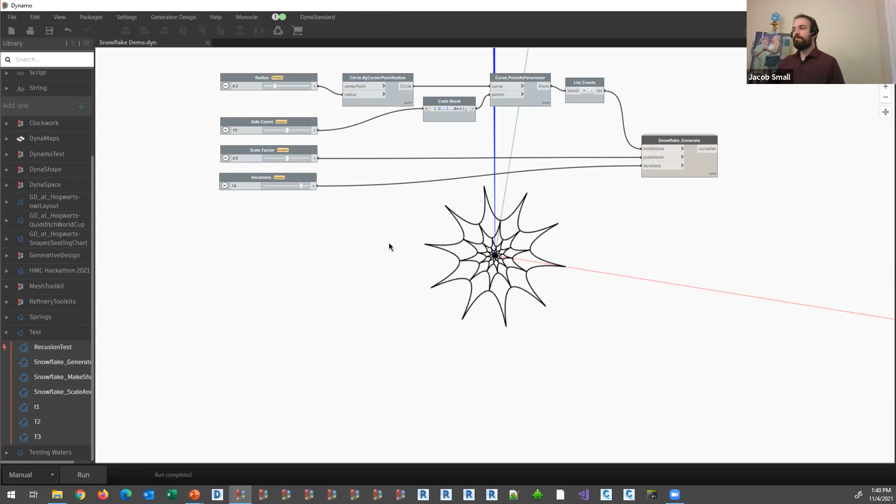Cool. All right, great info there, Sol. Let's pop over and have a look at some custom nodes in action. All right, so this is the first custom node that I've put together. And this is a graph where basically what I wanted to do is make these starburst, snowflakey shapes sequentially, right? And I wanted to be able to control some of these pieces.

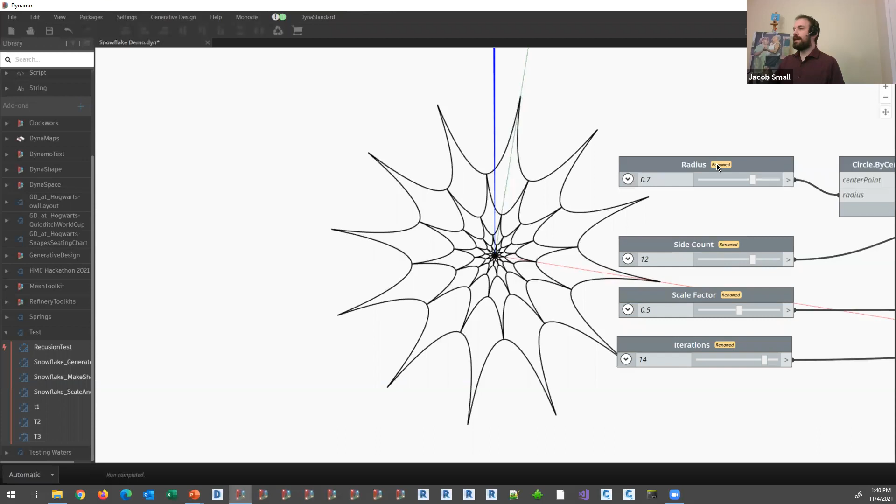So I wanted to be able to scale up the size, that's the wrong button. Scale up the size of my piece, change the number of sides. We'll go ahead and switch this over to auto so it runs instantaneously each time. If I wanted to adjust the scale factor on any individual loop, right? And so we can start to get these kind of spirograph shapes and scale patterns and whatever else it may be, which is pretty cool. Or if we were to change the number of iterations, right? Put less pieces on canvas, more pieces on canvas, whatever it may be.

And when you put something with this degree of simplicity in front of a user, pretty much anybody could figure out and play around with it and get some cool results, and likely even use that in their design if it meets the needs that they're really after. The harder part would be the original authoring, right? And that authoring in this case was several steps bigger. So this is the first one of those nested custom nodes that you can see here.

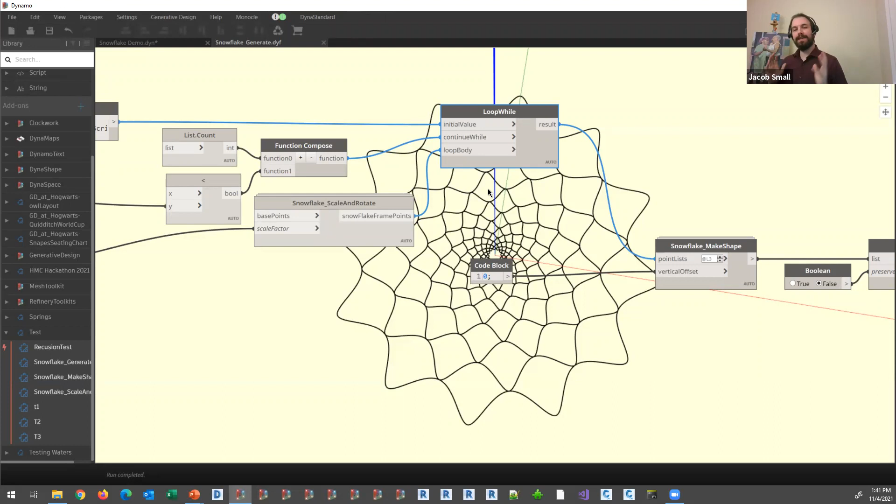I did have some looping, and I mentioned before, be real careful with your loops, make sure they actually end. If you say, as long as this number is less than that number, keep doing this, and you've got your XY inputs backwards, Dynamo will lock up infinitely and you will never get out of it. So definitely keep an eye out for that kind of content.

But you can see I've done some function passing where I've built a function from list count and is the next value less than the number of iterations that I'm after, and then pass that on into this loop while to use this other custom node, snowflake, scale, and rotate. And when I pop this open, you can see we've got more nodes, right? And this one isn't too crazy in terms of the content that's there, but the same content still applies. We've got our basic output all the way over there. We've got our inputs over here.

I've taken the time to spell out what I want the descriptor to be, right? I've wrapped it in multi-line quotes in case I wound up going multiple lines. So in this case, I can actually hit return there, and that content will keep as a quote line. Whereas if I'd used the other method of double slash, we would have to double slash repeatedly in order to make that work. So definitely, if you think you might have multi-lines, go ahead and just multi-line it out early on. Just makes your life a little bit easier.

So this comment is what gets exposed on this input, right? The points which form the basis of the snowflake. And if I come back here, the points which will form the basis of the snowflake, right?

The scale factor for the nested snowflake framework, and then the scale factor for the nested flake framework. Note there are multiple lines there, and this is pretty well scaled to the size that those inputs will go. So if your content starts to run long in terms of the help, but really useful info there.

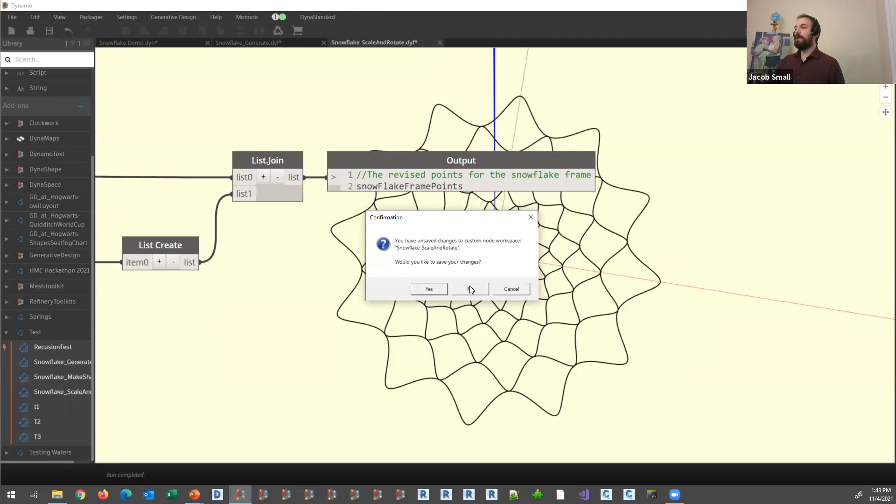And then we've got the same sort of content on our output ports, right? And again, we're doing this custom node inside a custom node inside a custom node so that we can make use of that other content. But you can see here, I've set what that output is. I've named what I want it to be. And that's the sort of content that really matters to help this scale up. I'm going to go ahead and close this. Yes, I will save changes for now, and then we'll look at the next custom node.

So we've passed this as a function in to do this function over and over again, as long as this statement continues to evaluate to be true, with this as our input, which is a nested list of points. Notice I did have to spell out my rank in there as well. And I generated a default value, right? And it's a pretty big one. That's a lot of text in there. I wouldn't necessarily expect everybody to know what that means, but it does get the point across, and it does allow this content to run if I don't provide one of those input values.

So anyways, we loop over that function that we built there X amount of times, and we move into this snowflake make shape node, and we open this up one more time, and then you can see all that content is there, right? Where we've taken our nested list of points, and then the vertical offset of each leaf. I've got that set up there, not really doing much with that, but there you have it, and then running this all the way over, eventually getting my output that I've set as just snowflake with nothing else going on.

So now when I come back here, you can see we're then going to clean that content up, flatten the list, shuffle the list in case I wanted to put some fun colors on it or something like that, and then set that output. And I also spell out what this should be. It should be a list of curves, not an individual curve. And this is going to enable autocomplete to work a little more holistically while simultaneously providing that other piece of content. So now when we get in here, you can see how all that works. And again, all of these pieces that I've nested one inside the other all happen sequentially for every user.

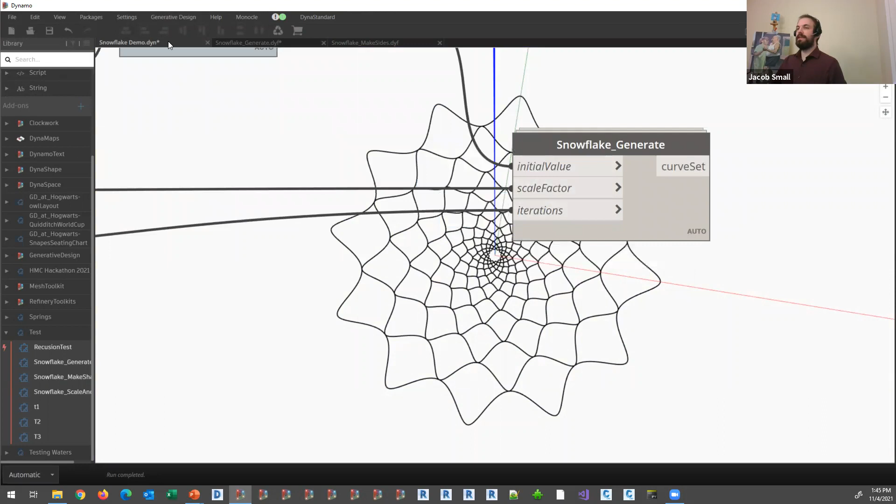I'm going to do one other thing. So we're going to look back at our original order here. We've got initial value, scale factor, and iterations. In this piece, I would take iterations as the last one, but it's listed in the middle here. So let's try and reverse these two. I'm going to go ahead and copy and paste this node, and then we can just hold down Shift and drag in where we want this to be.

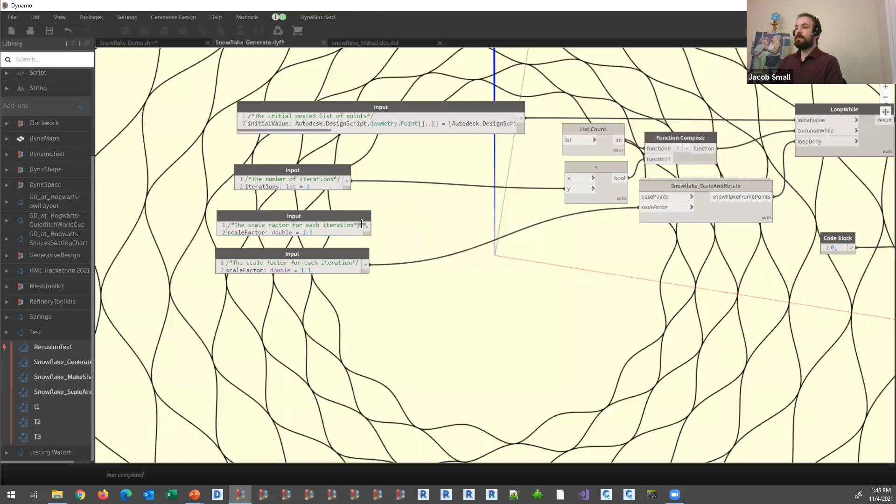Notice that background execution that happened there as I moved this around. That wasn't this node actually updating itself. There's no way for me to hit run here. This node that's running in the background is what's executing. So we'll come back here. Now that I've got this one, we'll go ahead and hit delete. We'll save on that. And looks like as I did that, I may have actually broken my content. Let's come back here and find out.

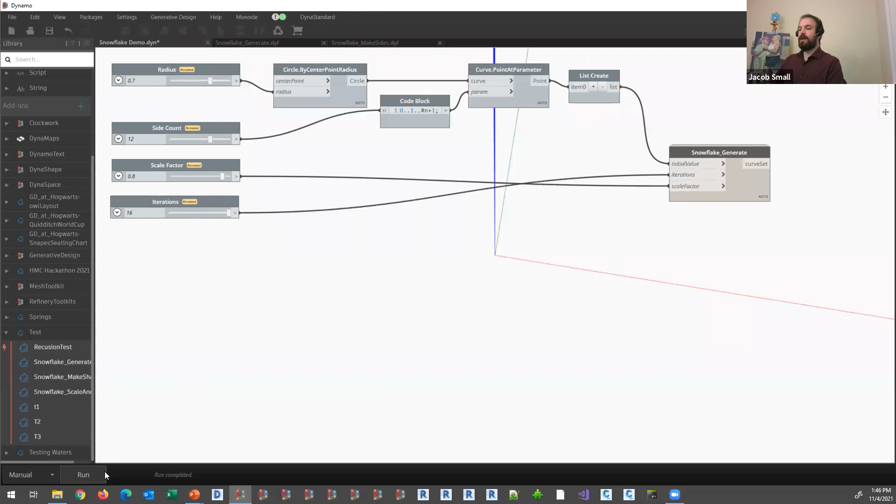We'll change this run mode back one more time. Scale factor is now listed below, whereas iterations is up above. As long as the value is less than 1, okay, that's definitely not going to work, right? So that change right there, just copying and pasting, is what caused that content to go out of sync. And that method of doing the copy paste is what you'd have to do to adjust those variables. That's the user interface way. You can do it under the hood by manipulating the text, but that's definitely much more advanced as you go along.

But from here, this content, again, can be leveraged at scale. You don't have to worry quite so much about doing that content over and over and over again. Another thing we can do here, if we come back all the way to this snowflake make shape, if instead of having the wavy curves, let's say we wanted to have something that's a little bit more angular,

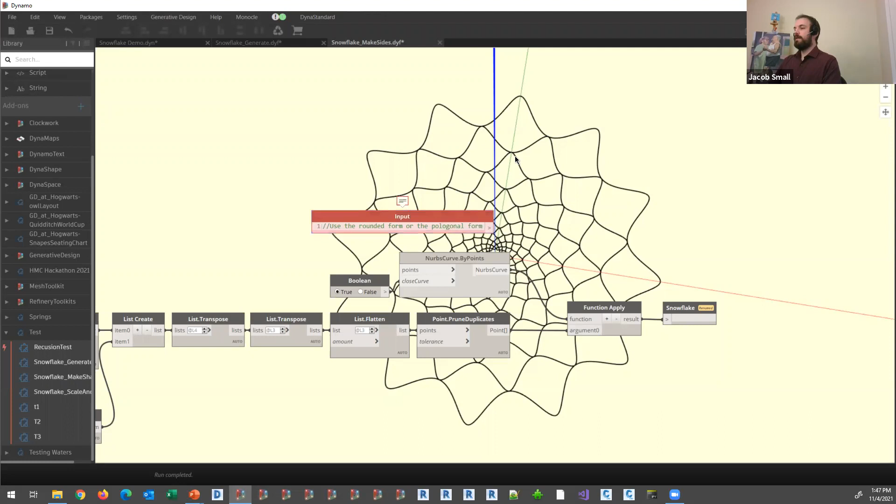I'm going to go ahead and set up a new input. And we'll comment out what we want this input to be: use the rounded form or the polygonal form. We'll go down one more line, and then we're going to call this rounded. It is a bool. The default value is true. Right? Content all runs through there.

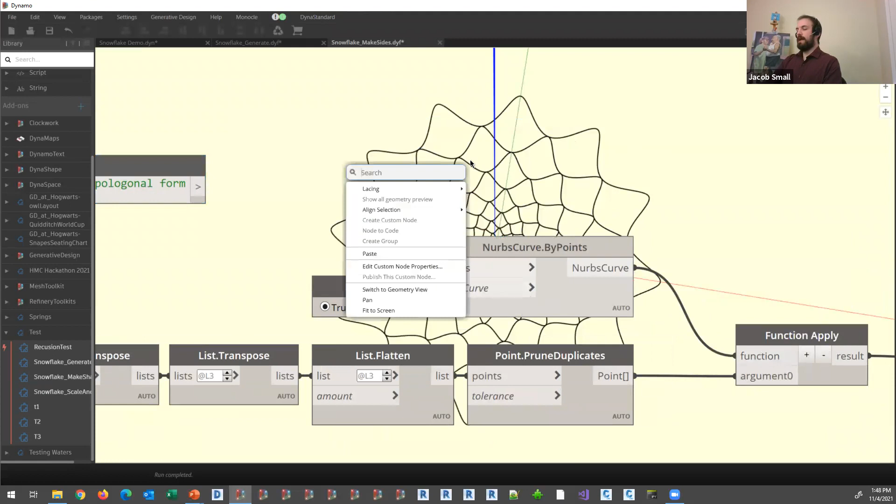Now I've got this node here that's set up to pass as a function into the function apply. We'll use a polygon by points node. This also can take a list of points, right? And then I'm going to take both of these functions and I'm going to say if. Put an if node on canvas, and if this returns true, we're going to return the rounded one. Otherwise, we're going to return the polygons.

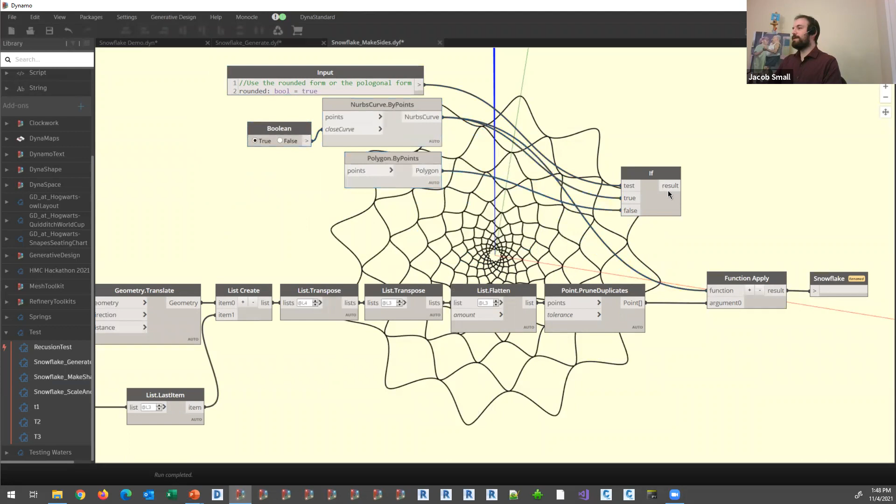These are backwards, and I really dislike crisscross lines. So I'm going to go ahead and move those around. No more crisscross lines. Much happier as a human being once that happens.

So now we can take our if node, wire that into the function. If this returns true, it's going to do that. If that returns false, it's going to do that. And now I've got a new input inside this make sides node, right? I'll go ahead and close this, saving the changes.

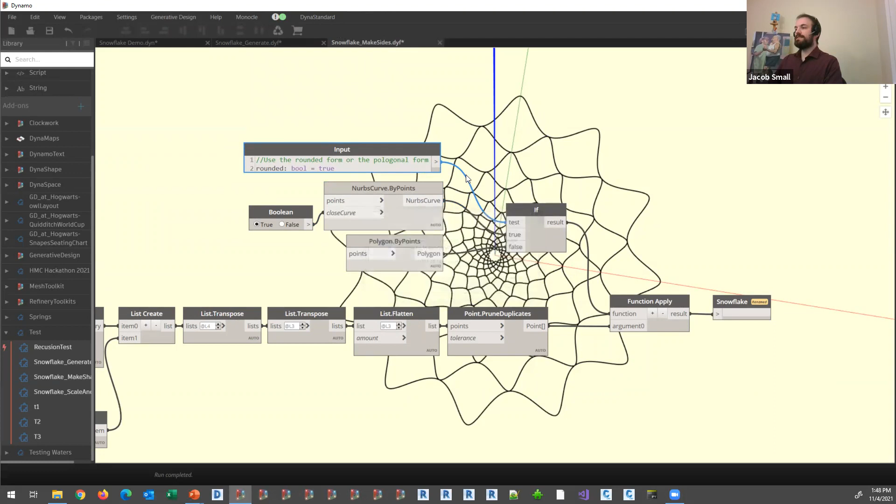And if I pop back here, notice I now have this rounded input, and it is telling me it's looking for a bool. It's telling me what it's expecting the default value to be, and it is currently a disabled default value. We can right click and tell it to use that default value. We can turn it back off if we wanted to, but really what we need is another input node, right? So we'll come in and say input once more.

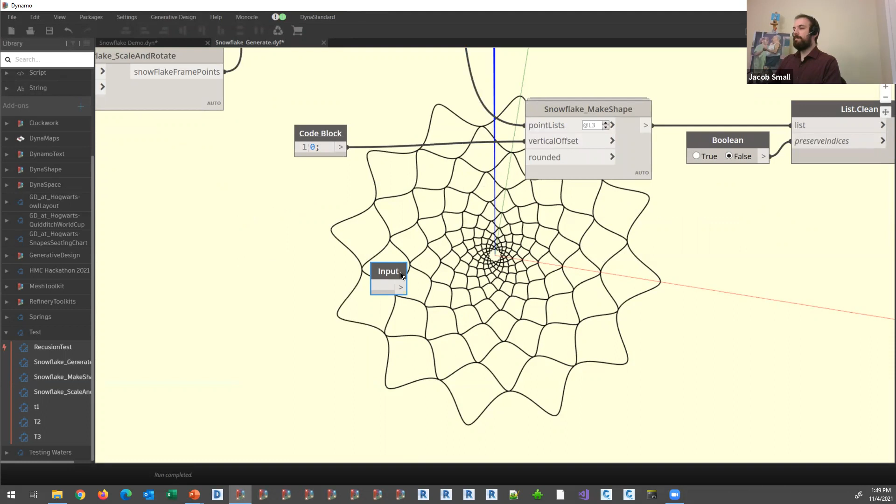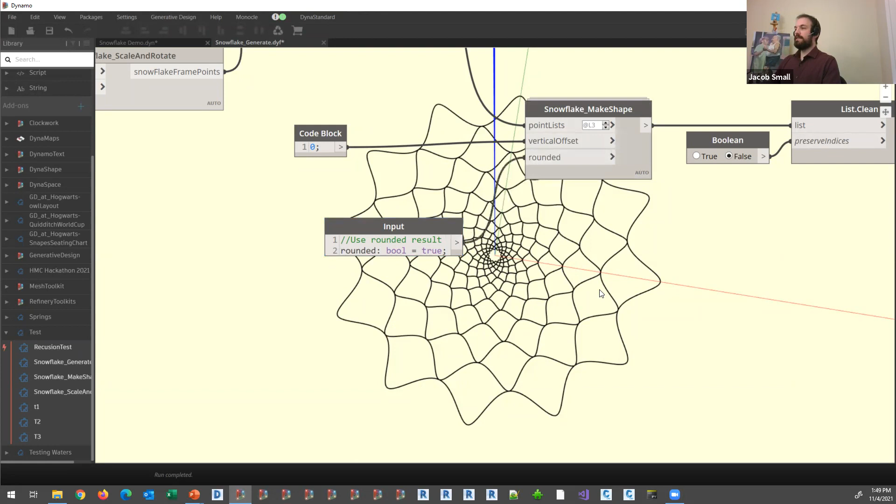And this is a little bit redundant because we're putting the thing inside the thing, and we need to set that up. We're going to call this out as, sorry, use rounded result. Then we'll come back down here, and we're going to call this rounded. Set what we want the default value type to be. It is a bool. And we're going to call that true as the default value. Wire this in there. No longer passing that as a function, so this should be good to go. We'll save this once more.

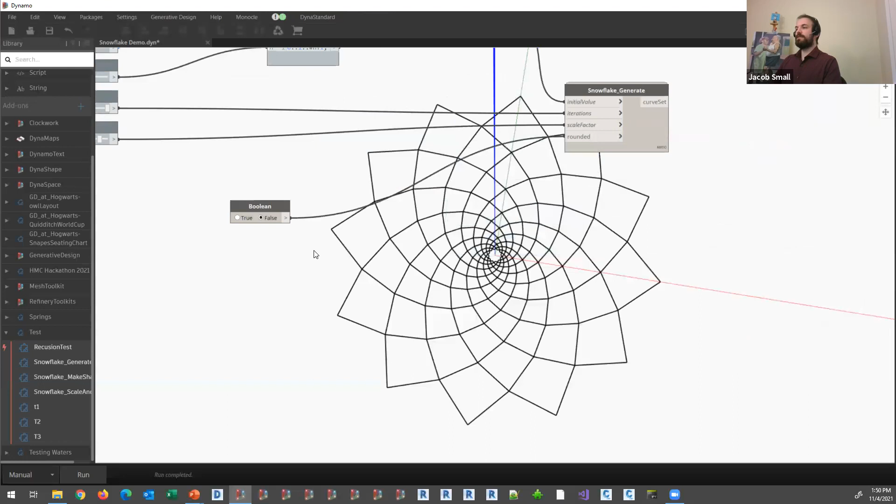And back here, I now have this other input. So now we can put a true false on here and quickly say, false, we're going to pass the polygonal version, which is a little bit slower to run, but still pretty cool, right? It starts to look a little bit more snowflakey in some ways, a little bit more flowery in other ways, but this is part of a larger workflow that I'm building based on a snowflakes post that was posted to the Dynamo forum recently.

But you can kind of see how that process works out in terms of allowing users to quickly scale up for whatever it may be that they're after, which is pretty cool.

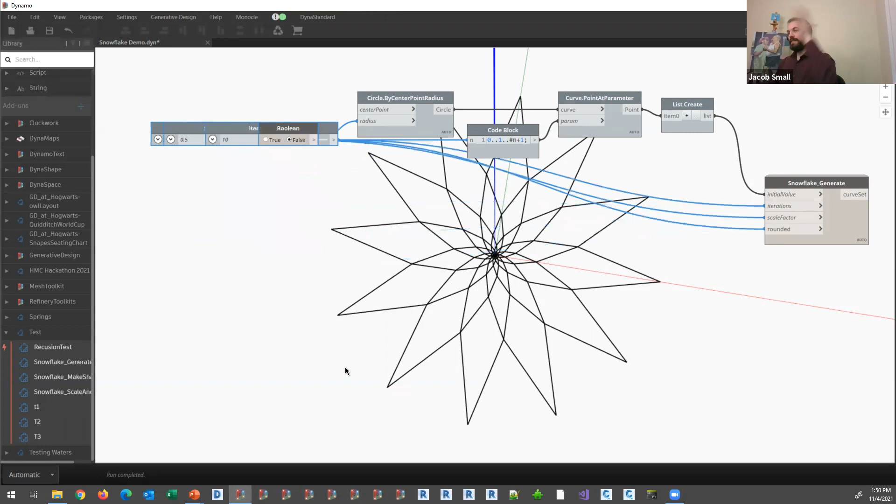All right, I did see something in the chat. Good to know I'm not the only one who spends this much time arranging nodes so wires look good. Yeah, I spend a lot of time. When I've got a bunch of stuff that's misorganized like this, Monocle has that great feature to align stuff, but I use my Alt command. So I tap Alt on my keyboard and then E and then A and then T, and that will align top, or Alt EAL will bring it all to the left, or EAR, bring it all to the right, so on and so forth.

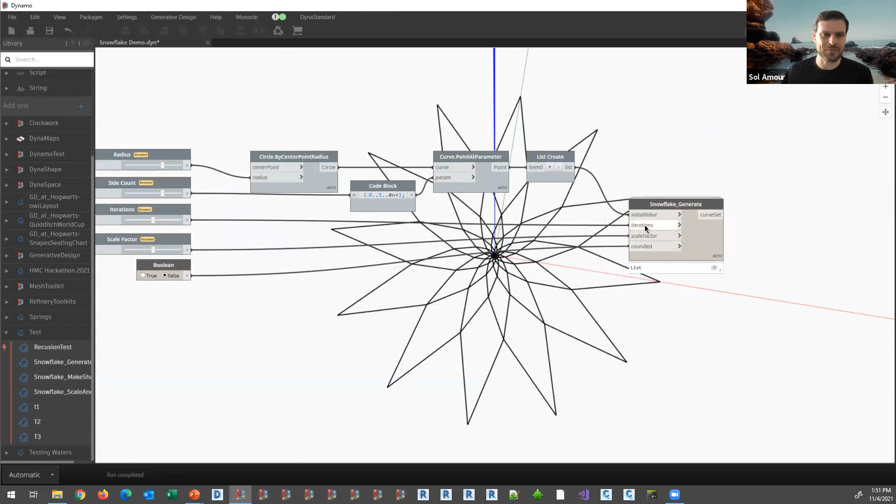I spend tons of time organizing my graph, because if you can't understand where the nodes are and make the logic quickly readable, it can be really difficult to fix problems as they present themselves, which they inevitably will. There's also a good reason to use custom nodes, because that means you have to do less of that, and it also helps with exactly the same problem, by making it easier to read and easier to use. Yep.

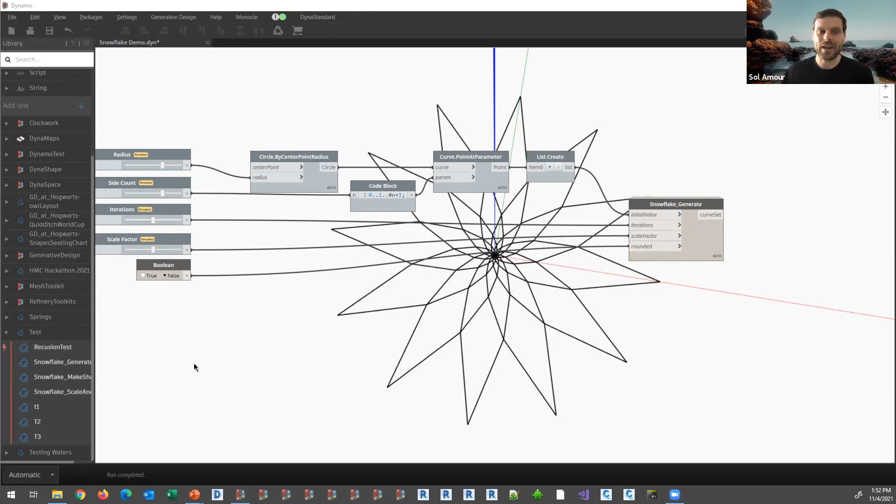I think one other thing to touch on, I don't know that we really talked about it, was the capability to write zero-touch nodes as well. Which, again, is a different type of producing the work, right? We could have put Python nodes in those custom nodes as well, but with zero-touch nodes you can do even more cool stuff, and they do get a little bit quicker, but there is a much larger bar for entry, right? It takes a lot more prep and setup.

If you think back to the session last week with all the Python stuff, every time you start to talk about something, oh, don't forget about this or that. It's even more. Yeah, there's a lot of rabbit holes. There's tons of value in there, but it's not the sort of thing we can really push quickly over a webinar like this, unfortunately.

And the other point is that if you use Dynamo and you can build 2 or 3 different graphs, then you're pretty close to being able to do a custom node as well. All you really need to learn is the inputs and the outputs, like we have shown you today. You review what you've seen today, you mull on it, you digest it, and then go and have a go. Go and try and make something.

Make something silly, like make a snowflake. Why not? Definitely make a snowflake and post it to the Dynamo forum, please. I like the snowflakes.

So we have a question in the chat from Adam. Where did the name Zero Touch come from? It doesn't seem to be a no touch type of creation. Yeah, it's a little bit of a misnomer. It's not true Zero Touch, but in essence, there's a framework that automatically creates all of the UI and the nodes in the background. All you have to do is write some functional code in the center using C#.